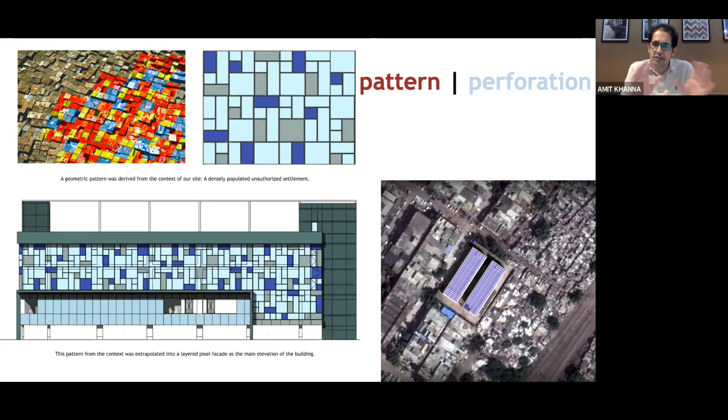So in general, the darker the glass, the less heat is transmitted through it; the clearer the glass, the more heat comes through. But you have to strike a balance because you also want to ensure daylight, and you also want to ensure that people working inside can look outside and have a nice environment in which to work. So we took this pattern and we overlaid it onto the structural system of the facade. This is the product that emerged from this process.

As you can see, it's divided into 2 parts. The lower end is plain glass, but it's got a slight overhang to it, and it's entirely laminated frosted glass, right? Because there we weren't looking for daylight, because the interior was a showroom. On the upper floors where we were placing the manufacturing, we were looking at daylighting.

And you can see that there are different surfaces to the glass. So the facade becomes a self-shading mechanism in some ways. This is a detail of how the facade was put together. There was an aluminium framework, and some glazing is placed on the outside of it, and some of it is recessed inside.

This is what it looks like from inside. As you can see, it is, slight digression here, but it's a large span structure. There are no columns in the middle of the buildings. It's about 15 meters width along the whole length, and the columns are only on the periphery.

And what we've done here is that we've used a webbed sort of a ribbed slab approach, where we have a truss arrangement in the concrete. And so each of these beams is only 18 inches, despite the span being so large.

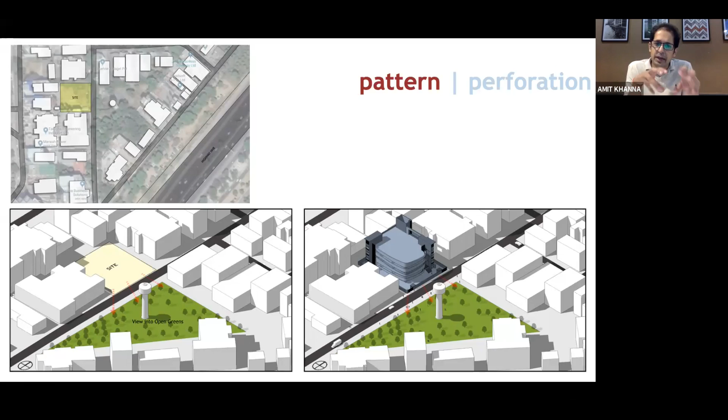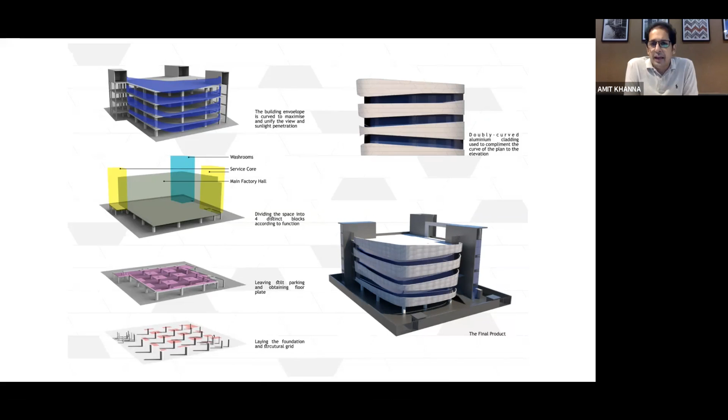So when we took the programmatic requirements of the site, and we looked at how one needs to place various service cores, we quickly came to an arrangement of how the system has to be planned. There were 3 service cores which were aligned on the non-critical side of the envelope. These service cores had the staircases and the washrooms. Within this area, we planned for the most efficient structural system, only 4 internal columns, and then we raised it. And then came to the question of how to enclose this envelope.

Now, this particular envelope was facing a less than favorable direction, unlike the previous project where we had a north-facing facade. This one was south, and so the essence was that we wanted to create some sort of shading mechanism. We took the idea of taking a glass facade at the rear, double glazed, and having it in a single color, and then creating this ribboned aluminium textured facade on the outside, which would curve in 2 directions.

This is the final result of the building. The aluminium cladding turns around the building, and it provides a really deep shading for the glass inside it. The angles that we had picked up from the site plan were used while articulating the joints of the aluminium. So all the joints where one aluminium panel meets the other are angled, and this angle speaks to the fabric in that sense.

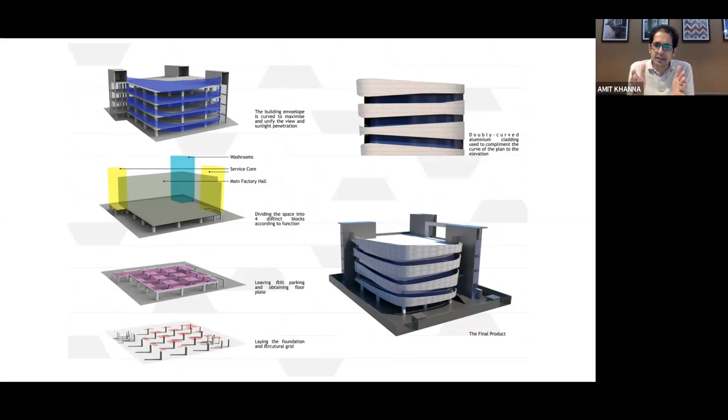The ribbons vary in height. The top ribbon is the largest, then it becomes smaller and then smaller as the shading requirement changes. It also tapers inwards. So what you can see here is that the topmost is furthest out, and the lowest floor is slightly smaller. This is a detail of the facade. As you can see, although the aluminium is laid out in strips, the black lines are highlighted by this angular arrangement.

This is another detail to show you the extent of the overhang that was employed just to achieve the correct energy efficiency in the building. Again, these black lines being used to sort of articulate the pattern.

This happens to be the headquarters for a sanitary ware company, and they had extreme requirements for daylight. So as you can see from the inside, it's quite bright, but you don't have to have a singular glass facade in order to be able to achieve those daylighting levels on the inside. Although the building is curved, I should add, there are no curved glasses in the building. All of the glasses are straight.

The third project I want to talk about is something that we were asked to do in a place called the Hosiery complex in Noida. This is an industrial suburb of Delhi, and it's a sort of a hub for garments manufacturing.

The idea was that they wanted to create a state-of-the-art facility which would help them secure orders with buyers that were conscientious about sustainability. As sustainability becomes a mainstream issue because of climate change, every person who is employing another person to do something wants them to be sustainable while doing it. So it's not a question of, for instance, buying something at the cheapest cost. They also want you to take care of the environment in which your workers are working.

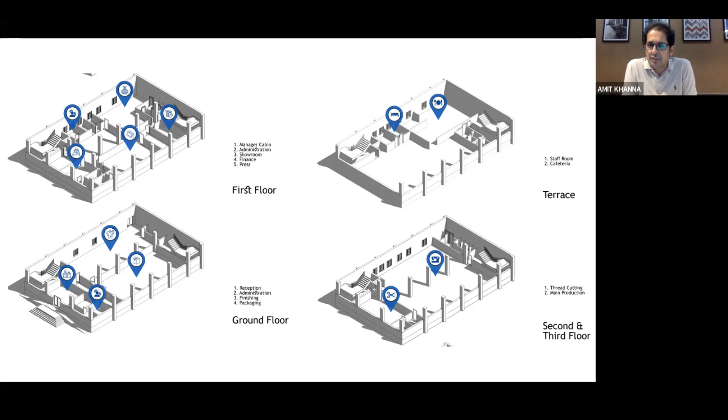On the first floor was where they had a showroom, managerial cabins, and the offices for the owners. Two floors of production, second and third floor, and a cafeteria and a sort of breakout area for the workers on the terrace. Pretty straightforward layout in terms of plan as well. Rectangular plot, maximum envelope, minimum open space, only setbacks left. Structure devised for efficiency. Again, distribution of cores, etc.

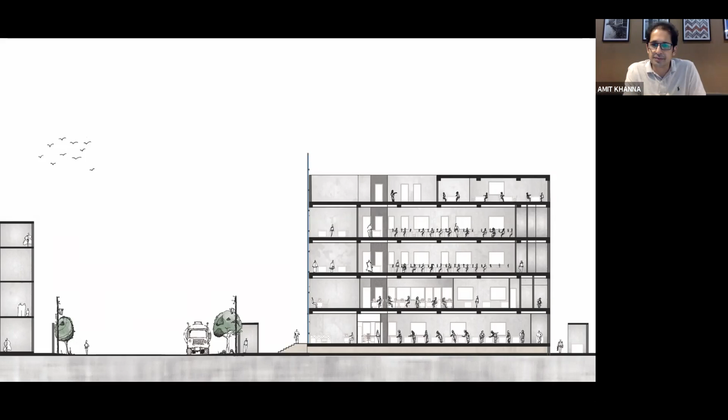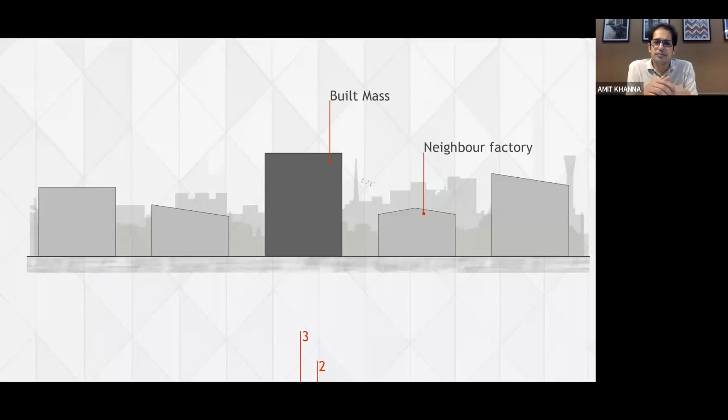Pretty straightforward stuff. Again, the section is also, I would like to say, cookie cutter, because when you're working in industrial buildings, you have to optimize the manufacturing process, rather than keep one eye on how well you're doing as an architect in terms of section. This is the site context. We had neighboring factories that had all sorts of profiles, and we had a built mass that was going to go up slightly more than the scale of the surrounding areas.

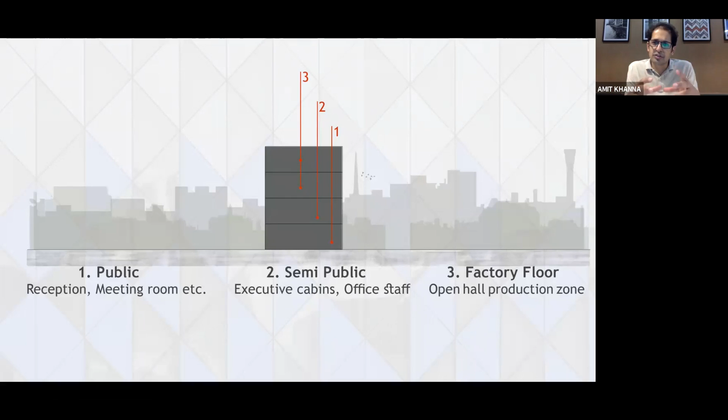And we looked at the elevation, and we saw that we're going to have this arrangement where the daylighting requirement is more on the upper floors, and it's not much on the lower floors, pretty much like the first project, because that tends to be how factories get laid out. You do tend to have areas on the ground floor that don't need a lot of natural light. Quality control in garment factories means that you have to have artificial lighting, and you can't rely on natural light to examine colors, etc.

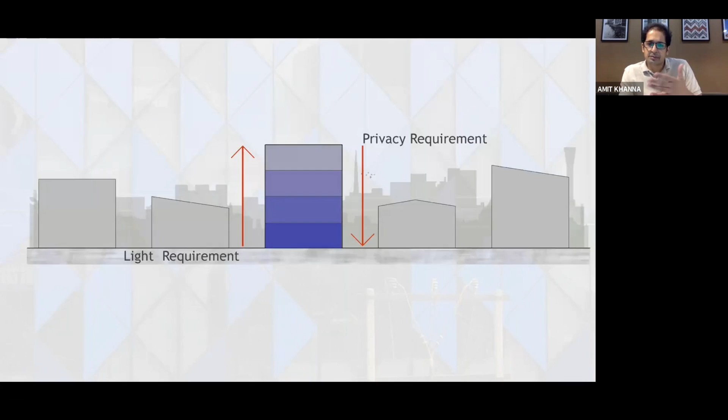So yeah, we had a greater requirement for light on the upper floors, a lesser requirement for light on the lower floors. And that gave us the idea of making a graded building. And when we looked at a graded building, we thought, okay, what is the best way to do it? So we looked at two materials, again, aluminium and glass.

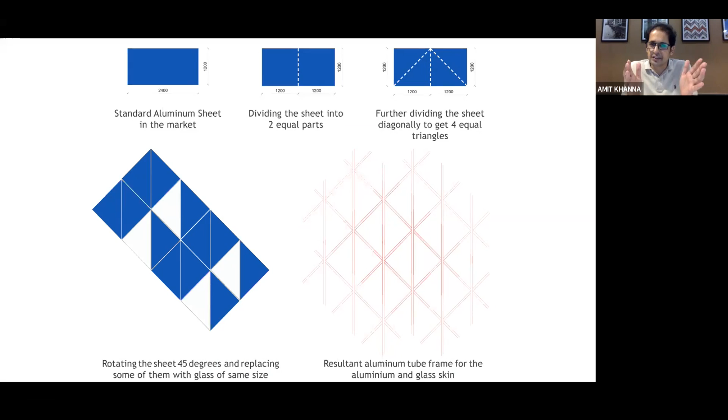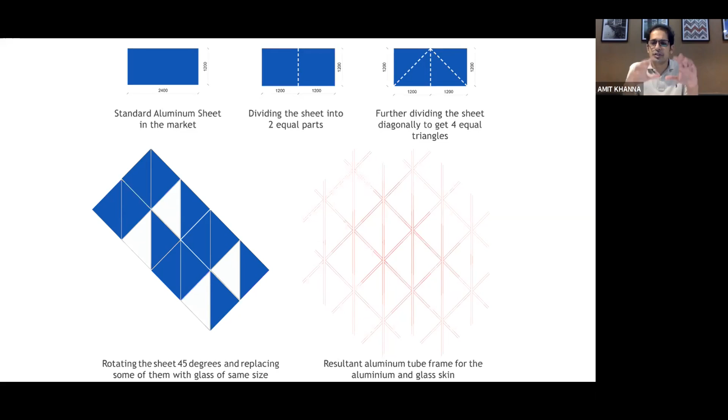A lot of these products are available in the standard size, which is 8 feet by 4 feet, 2400 mm by 1200 mm. If you divide it into 2 and then further divide it into 2, you get these 4 triangles. And these triangles, when turned on the side, can give you an arrangement of structure that is not only latticed for wind bracing, but it also gives you the efficiency that you want. So none of these panels waste material, right? And a latticed grid, like we saw in the first project in the roof, always gives you more structural resistance than a plain Jane horizontal and vertical facade. So we looked at the idea of creating this pattern and having a triangular system of framework.

Since we had the option of mixing glass and aluminium, we took 4 colors of aluminium, started with a darker color on the lower end, made it a lighter color as we went up the building, and by the time it reaches the top of the building, the glass color and the aluminium color are almost similar. And that gives us a sense of how the building is sort of disappearing into the sky.

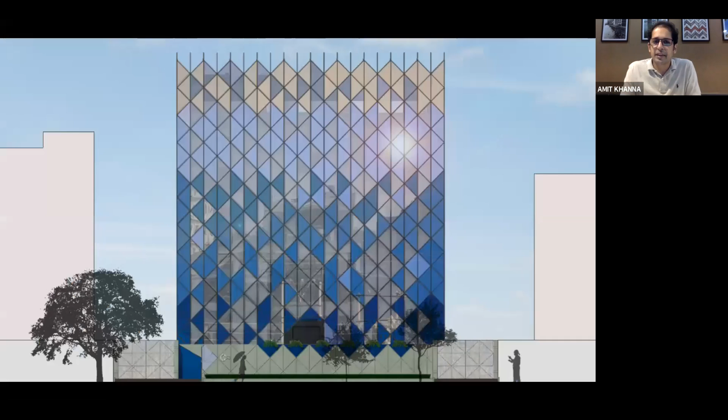This was the final elevation that was drawn out, where you can see all the sort of grayed out areas are glass panels. There's a density of dark blue, and that blue dissipates as it goes up. Why we chose blue? Well, our company font is in blue, and I like blue, so it was blue.

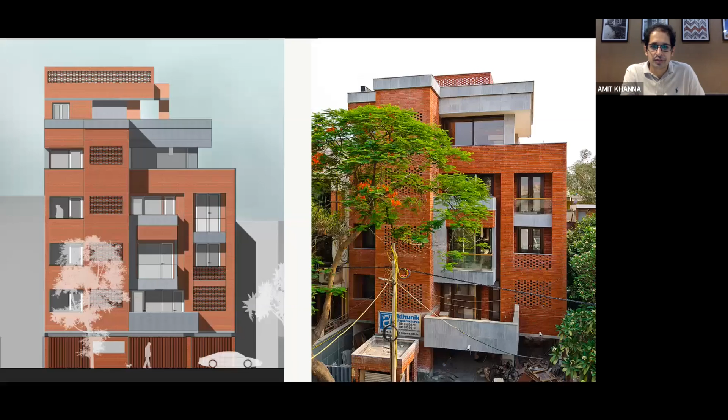Can this be a slightly longish answer? Yes, for sure. Okay, so I'm just going to take you through. I'm going to show you this project. This is an industrial warehouse project that we did about 10 years ago, and it was a greenfield site south of Delhi, about 7 acres of land, about 150,000 square feet of built up area.

The brief to us was that we needed to create a warehouse where electrical items would be stored. Ideally, they should have been air conditioned, but because it was a large volume of space, we were asked to come up with an idea as to how we can reduce the internal temperature without having to resort to air conditioning and only use air cooling.

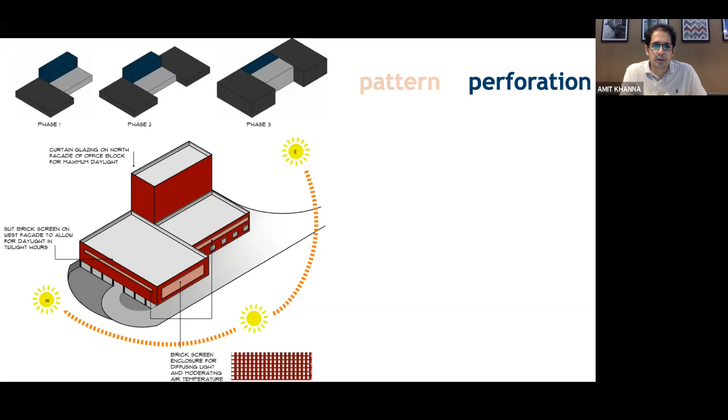We have a warehouse space inside, which is 20 feet high. There is a glazed surface, 1200 mm inside of the actual facade. That 1200 mm buffer acts as a thermal buffer for moderating the light, the glare, the air temperature, and also allowing for access to the services. So this is also where we placed an array of coolers. On the outside of this, we clad it with a brick screen, and on the roof, we created a 200 mm layer of insulation. And again, this was covered with reflective white tiles.

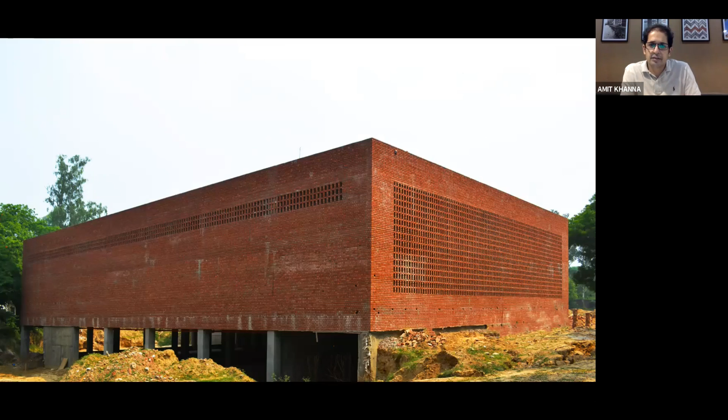This is the resultant exterior of the building. On the right-hand side is the south facade, where you see this large screen. On the left, there is a very thin screen on the west wall. This is a detail of the brick facade. This is the interior. Because this was for an industrial client and they wanted to see how well the building had performed, they actually did an assessment of interior temperature versus exterior temperature over a 2-year period.

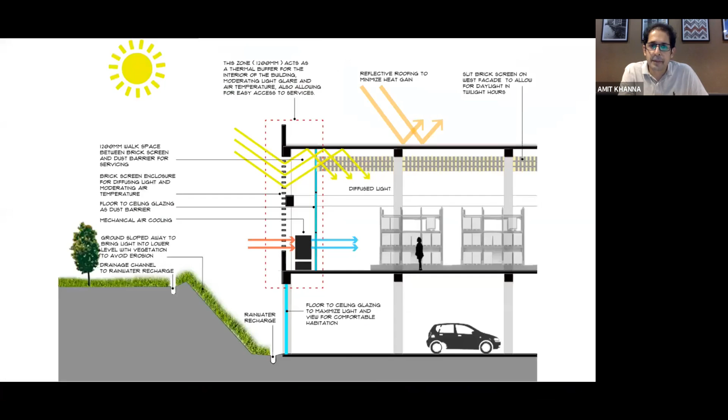This is a passive approach to energy efficiency, where we've been able to achieve the difference simply by knowing ahead of time what we had to achieve, right? A challenge is that some parameters are not normally laid out ahead of time. And so I think in this case, as architects, we need to be good listeners. If a client says, this is something that is important to me, you can use this as the basis with which you proceed with the design, right? And that delivers good outcomes for all parties. Yeah, I just wanted to share this with you.